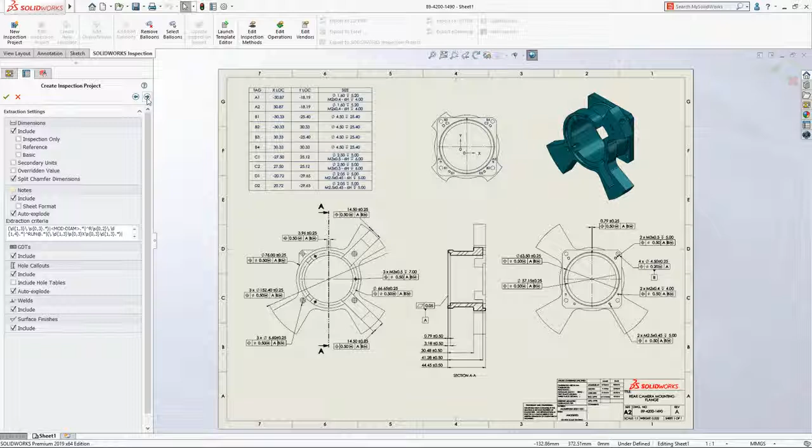Inspection 2019 adds support for even more annotation types. You can now choose to extract and balloon hole table information as part of the project. Once all the annotations have been ballooned, the extracted characteristics are displayed in a new tabular layout, making it easier to view and manage all the information from the drawing.

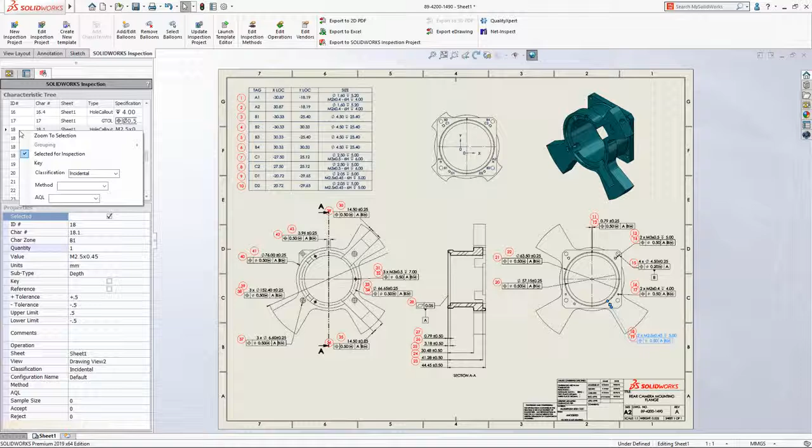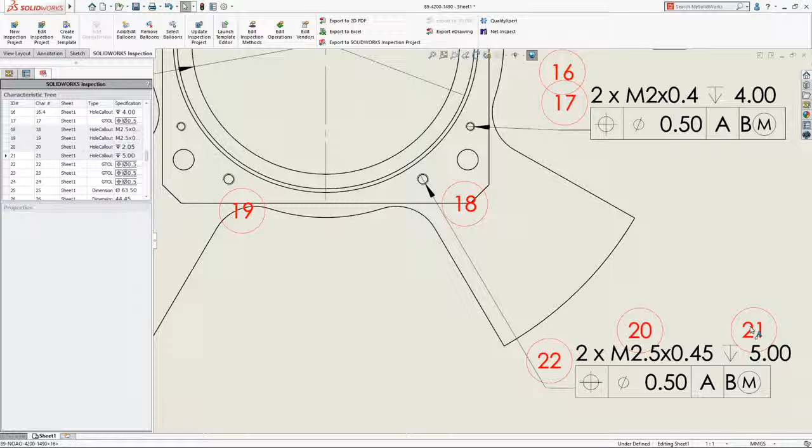Inspection now includes many more options for managing the grouping of characteristics, giving you complete flexibility over the way in which annotations are ballooned. For example, using the Ungroup option, this hole callout can be split into multiple items. Now each hole size and depth are identified as individual characteristics, each with their own balloon, and can be modified independently of one another. At any time, characteristics can be regrouped together, either with a single shared balloon or as a subset of the same item, giving you complete control over the way in which project information is displayed.

With all the great enhancements in SOLIDWORKS Inspection 2019, you can now generate your first article inspection reports more efficiently than ever.